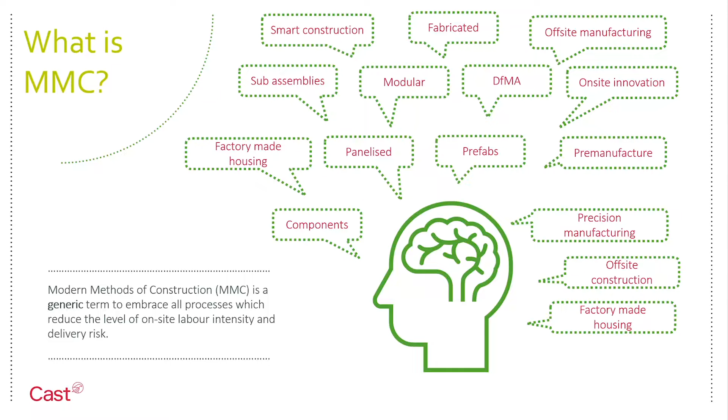What we've seen since I mentioned that report from Mark Farmer in 2016, the Modernise or Die report, which basically said the construction sector labour model is not working and can't work for the long term, is that there has been a shift from government to supporting modern methods of construction in different ways.

Just to pick up on a couple from the graphic, I think key ones are that the industrial strategies produced around 2018, 2019, started to draw connections between modernising construction, employment skills, and better productivity, output, and delivery of housing. The MMC agenda could bring those different agendas together. That was really important because it unlocked funding.

There's been commitment from government to funding in lots of different ways, and we'll hear about that later. Particularly government funding for MMC in house building through Homes England, but also in other development sectors such as education, where there's a significant drive for using modern methods of construction. This really started to stimulate the supply side and growth of investment in manufacturing.

The third one is really what that starts to do in terms of regional policy. We're working with a number of regional government bodies that are starting to draw connections between housing delivery in their regions - for instance in West Midlands, London, and Greater Manchester - combining efforts to utilise public land, public investment, and modern methods of construction to both speed up housing delivery and create industrial benefits in terms of research and development, advanced materials, jobs, skills, and training. No doubt we'll hear more about that as we go on.

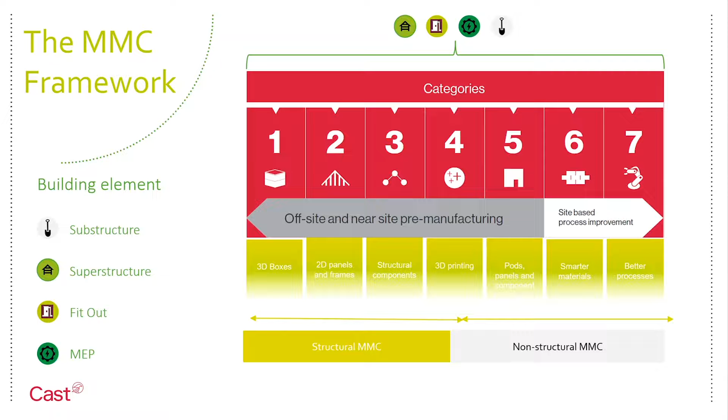Another phrase we should define early is PMV, or pre-manufactured value, which measures how much work is done away from site. To calculate PMV, you work out the value of a build, then work out how much of that value is done away from site—the result is a measure of how much of your building is MMC.

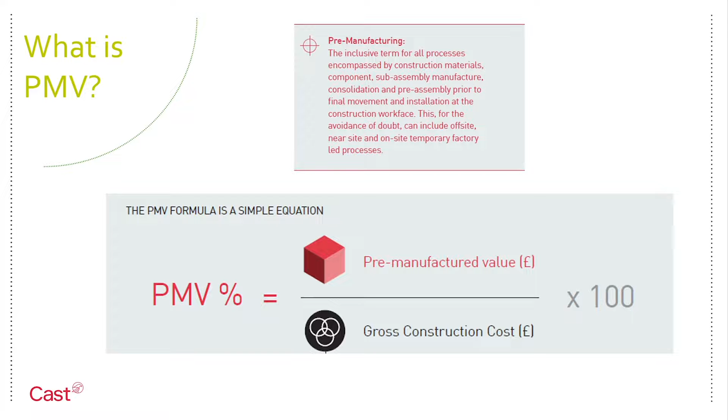PMV is important because some of you may have heard it talked about in terms of funding, as a metric for the extent of MMC. From our point of view, it's really just a proxy for doing things better, and it's not something you necessarily want to be driving to a high number on.

It's something you want to be thinking about in terms of what's the optimal number for PMV. In the funding arrangements there's a 55% kind of aspiration for PMV. Those larger volumetric offsite schemes I talked about would achieve 60-70%, and that's not always the right answer for a scheme. So one thing to think about in conceptualizing MMC is optimizing pre-manufactured value—for my site, given logistics constraints, the contractor model, and the labor force available, what's the way to push from where we are now to a better PMV, not necessarily saying that going right to the end of the spectrum is the right way to go.

I'm conscious I need to keep to time, so I'll fly through the next couple of slides. I think you'll hear about this later, so I won't touch on it too long, but that concept of PMV is now landing in funding agreements, and you'll hear more about that through the rest of the presentations.

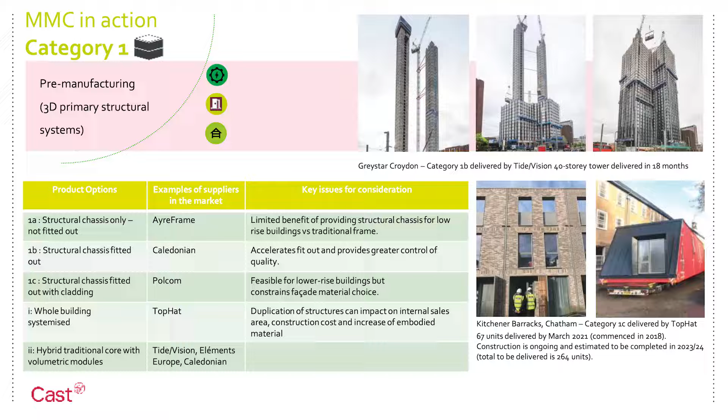Just very quickly to give you imagery and examples behind that definition framework of what is MMC: this is category 1, the far end of the spectrum—3D boxes assembled in a factory, created in a factory and assembled on site. The example in the top right corner is the world's largest volumetric tower in Croydon, a 40-story tower delivered in 18 months, exemplifying the benefit of a tight inner city scheme. A complex building makes more sense here than in lots of other situations to take as much work away from site as possible, then finish the job on site by assembling those modules. That's category 1.

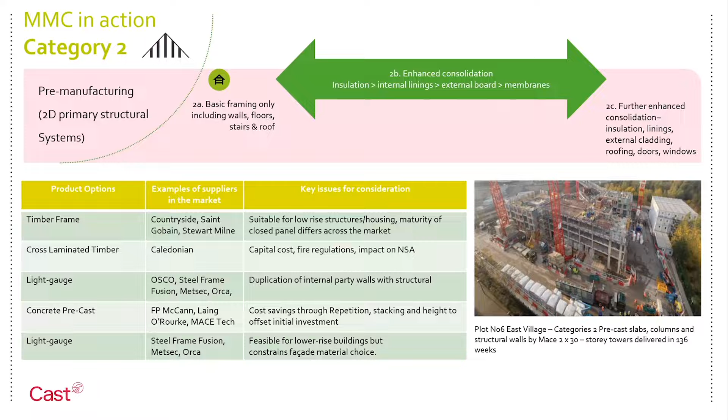Back to the previous one. I want to touch on market trends and what you might be hearing about out there in the market. The first trend is that this is starting to take off now. Not only are specialist modular and other types of MMC manufacturers starting to emerge in scale, but we're seeing it being picked up by house builders and major developers in this country, which I think is a sign of maturation in the sector, a sign it's becoming a bit less out there. If the likes of Berkeley, Barratt's and Countryside are investing in their own manufacturing capabilities, then that logic around it being smarter, less workforce dependent and more productive to do elements of buildings in factory situations is starting to land. You can see that commercially that's being picked up by big organizations in this country.

This is something manufacturers are learning, developing, evolving as we speak. It's something that will continue to evolve. The fact that we have failures in this space is instructive, something to watch out for. But I think what we are seeing is actually a maturation, and certain sorts of business models will become more productive, more useful, more evolved to market conditions than others.

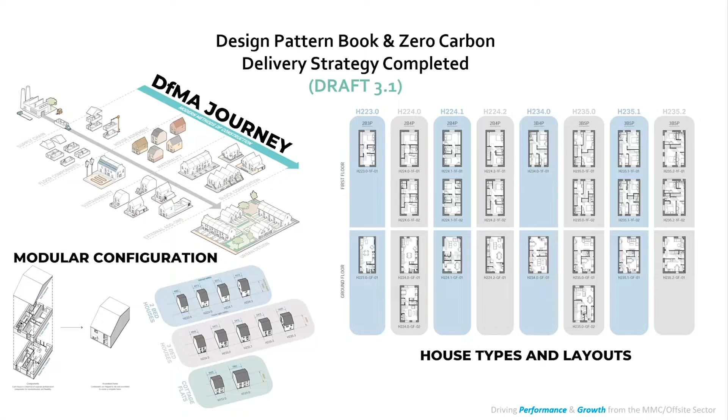If you can just slip through the next two slides, please. So the slide before is just the master planning and how we lay the houses out and how we design them right through to future home standard, which is where we started. But we also have a strategy for passive house and net zero carbon as well, and embodied carbon, looking at how we get from where we are today right through to zero carbon.

And a lot of the RPs are saying, what's the point in going to future homes? Let's go straight to zero carbon. Let's get the fabric first sorted out, and then we can plug and play with the systems moving forward. So we've done a lot of work in this area.

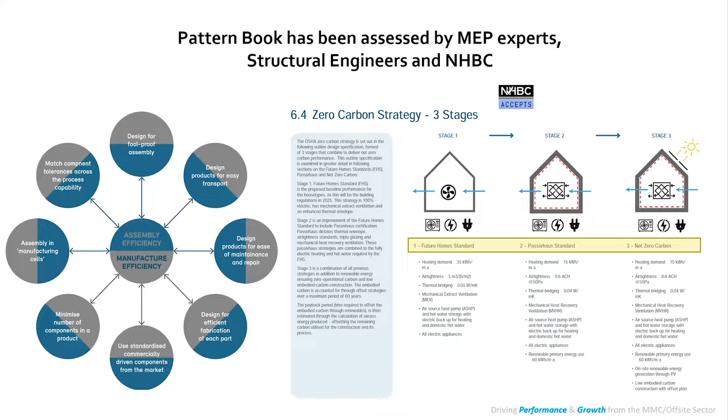Next slide, please. And here you can see just an example of what's in that design and zero carbon playbook. There's a lot of information in there, including things like environmental design, costings, estimated bills, carbon payback periods, and that sort of thing. So we've done a lot of work on this.

Particularly, it's taken a long time, almost 12 months to develop this playbook, which has now got an NHBC accepts stamp on it, as it is at the moment, to RIBA Stage 3, and they'll be working with us to make sure that we deliver this in its full glory.

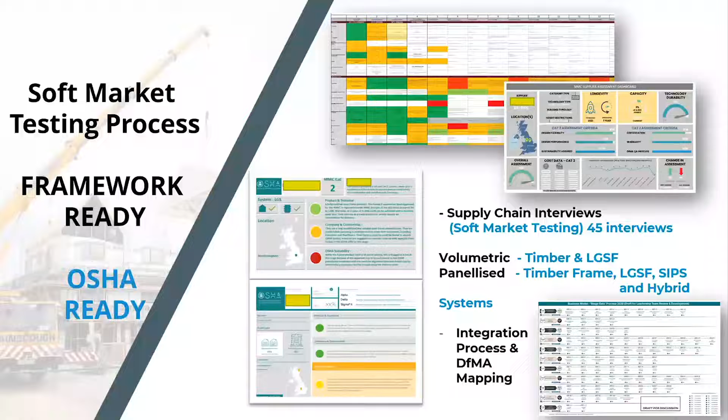Here's an example very quickly of how we're looking at vertical integration. So where the project starts, what we would need to do, looking at the sites from pre-delivery right through to RIBA Stage 3 and onwards, because this is really important, trying to understand whether the site is ready, what type of system is right for the site, etc. So we'll be looking at all of this and making sure we provide support and guidance on this as part of the framework.

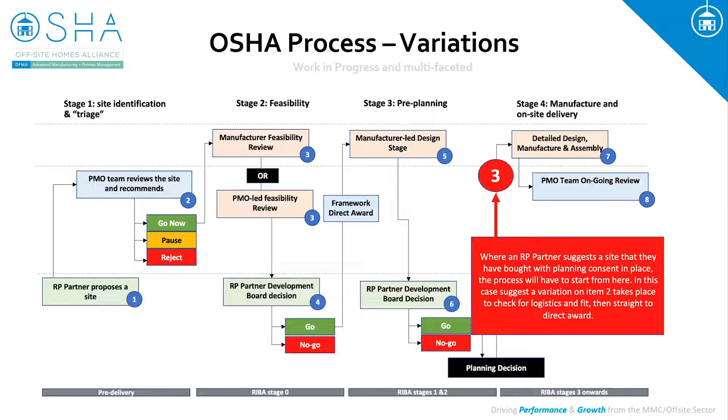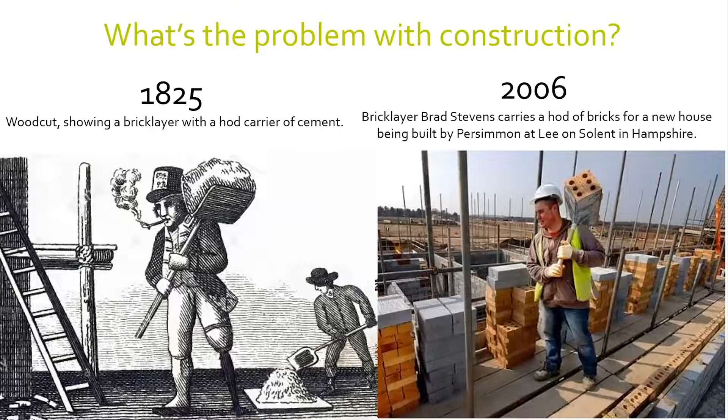We talked about the economy and the construction. We've already heard from Charlotte earlier on the 5-point plan. All I wanted to say really is that it's a cross-cutting theme for Homes England. So support for MMC is being embedded through our digital colleagues across all of our programmes. It's not just the Affordable Homes programme, but the next 10 minutes or so we certainly will be covering examples from the Affordable Homes programme.

Okay, next slide please. The Affordable Homes programme, £7.4 billion, so a significant contributor to the delivery of modern methods of construction. For those who don't know, there are two routes to funding. We've procured strategic partners, 31 of them have signed up to the minimum 25% target, and that's delivering the higher 3D and 2D modular, or more than 55% of the home being pre-manufactured.

It should be said that there is also funding available ad hoc, site by site, for non-strategic partners. It's called CME, continuous market engagement, and we will look at schemes. The useful thing for continuous market engagement is there is interest from local authorities, SME providers, community land trusts, a whole wide range of types of providers, and we look at schemes individually, scheme by scheme costs.

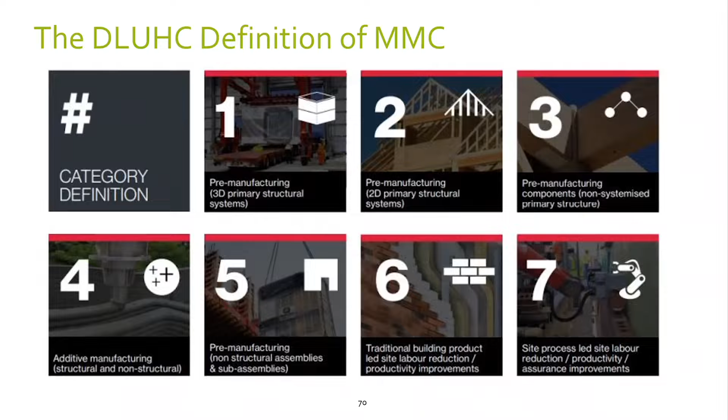So next slide please. Just a quick reminder, we are using the 7 categories. They are available - they were on the slide earlier, but they are also on the .gov website, and we can post that in the chat for anyone who's interested. I won't go through the detail - I think there was quite a lot already covered on the 3D, the 2D, right down to site process, site labour reduction. So come and talk to us, or go and have a look on the website. We're here - I'll post my contact details if anyone wants to talk to me about how that fits with the Affordable Homes Programme. Next slide please.

PMV - I see there were a couple of questions about PMV and how it's calculated. Our colleagues from CAST really are experts, but yes, come and talk to us, go and look at the website. I think there was a link earlier in the chat, so I won't touch on that. It's a percentage, and for the Affordable Homes Programme, we're looking at any homes that are delivering more than 55% - that's one of our priority areas for funding. If you do that, we will give you a bit more grant, subject to the value for money. Depends where you are on the programme, what the procurement is looking like. So next slide please.

And at the end, the pre-manufactured value - again that's a calculation you put in manually. And we would ask that it's populated at the point a scheme and a home is completed. So as soon as possible, but absolutely by completion, please.

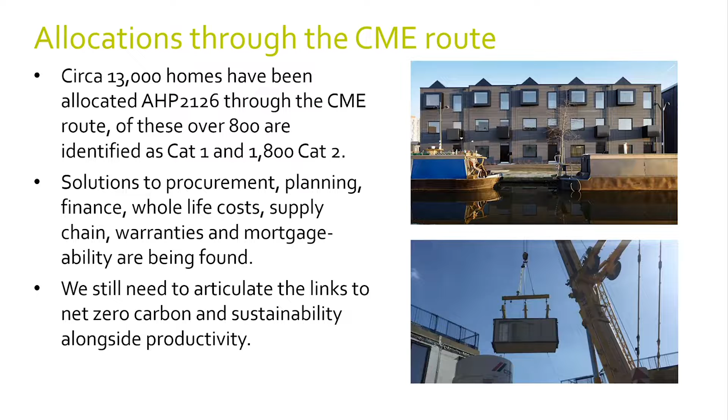So the good news for us is that we're seeing real commitment from our partners to that whole agenda for modern methods of construction. We did have some questions about how the link to net zero carbon sustainability is also being articulated. I think we need a bit more work to draw those elements out of the modern methods of construction in the programme, the AHP 21-26.

Next slide, please. So the next few slides I thought would be really useful to just showcase some of the schemes that we've grant funded through the Affordable Homes Programme. Please don't worry about reading the detail - it's there for you to have a look at later when we circulate the slides.

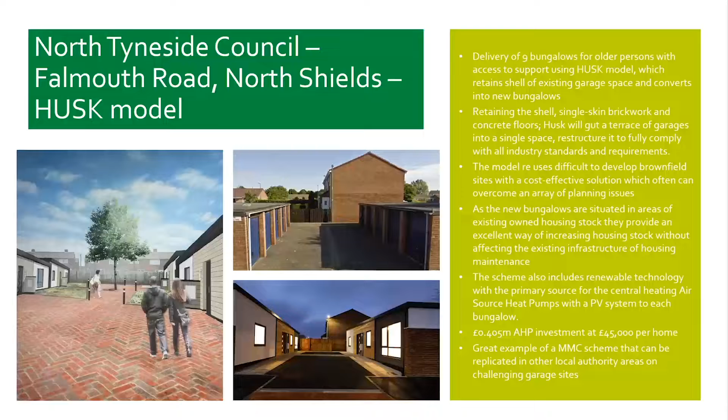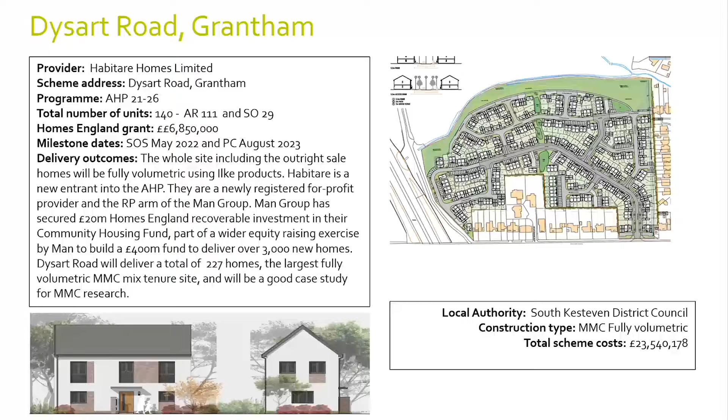And you can see at the bottom that they do have quite a traditional look, not so new agey as maybe some of the city centre sites might have. Next slide, please.

BoKloK on the Brook, we know it as Airport Road. This is a scheme being brought forward by Bristol City Council. It's fully modular, off-site manufactured. BoKloK, for those who do not know, are a joint venture between Skanska and IKEA. So they are building 173 homes, 43% of those affordable.

We're putting grant in to increase the Section 106 beyond the bare minimum. It's an area of high affordability pressure, and there are homes for rent, homes for the open market, and low cost home ownership. So we're really pleased to see this. It's

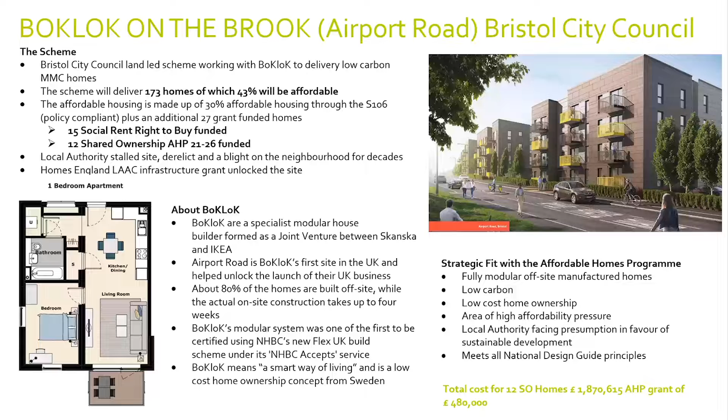also one of the first to be certified using the NHBC's new Flex UK build scheme under its NHBC Accepts service. So we're really interested. Please don't worry about the slides, as Victoria's just put in the chat. We will share them, you can look at the details at your leisure. Next slide, please.

This one is Brue Farm, and it's an example where we are enabling MMC through both our land disposal and the affordable housing grant. So the site was disposed of. It's a collaboration between Abri, Keepmoat and Ilke, and then we did convert it to 100% affordable housing using the Ilke Modular Homes product. It's over 75% PMV, so it's 100% Cat 1, and I'm particularly impressed with this one because they are ensuring we have local people from Highbridge who get apprenticeships. So part of that allocation is delivering more than just the affordable housing, the MMC.

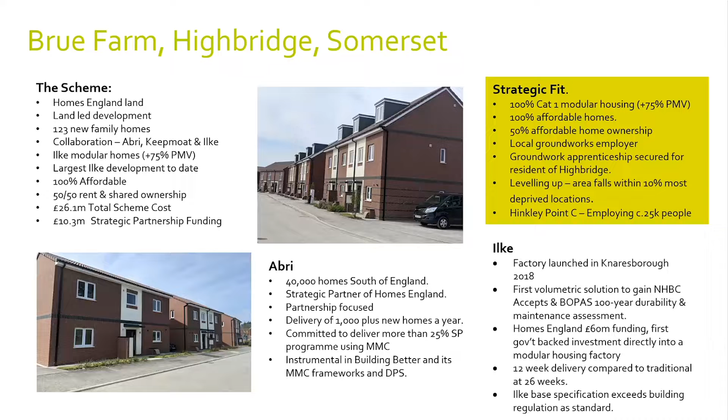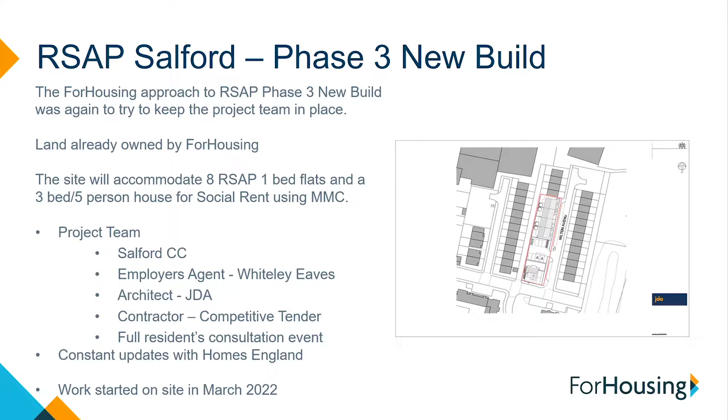So our approach now is going to slightly change. For RSAP phase 4 and phase 5, again we bid on these phases and we've been successful on both. Our approach here will change slightly, in that we will be looking to develop these sites in partnership and working closely with the Offsite Homes Alliance. We're one of the 23 partners working closely with Mike and the other RPs, and we're close now to moving forward through the framework to look at how we can develop and deliver these next 2 sites.

This is a small site in Eccles. This will deliver 6 one-bed flats through the Offsite Homes Alliance. We're just about to get the planning application in, and hopefully we'll get a start on site in September 2022 on this one.

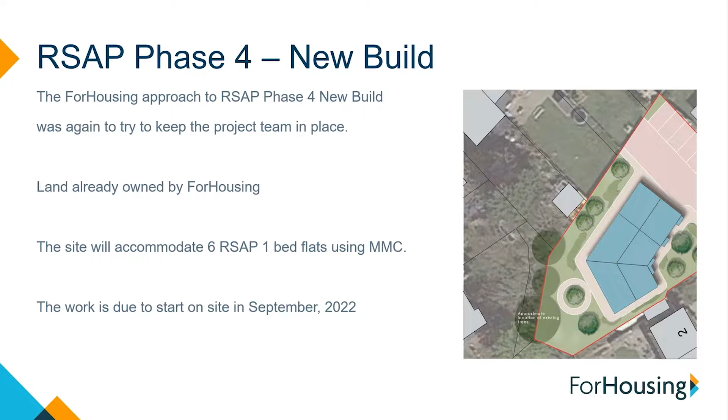This is phase 5, and we've just had confirmation a couple of weeks ago that we've got a next phase to deliver using MMC. Again, this is something we'll look to deliver in partnership with the Offsite Homes Alliance. This is for 8 one-bed flats, and this is an infill site, not a garage site. Again, land that transferred over, and having that land sat within the organisation has been key for the whole RSAP process, and also key for looking at the Offsite Homes Alliance and the modular product we can use.

The key thing here has been that we'd already done a lot of site investigation work and initial feasibilities on the sites. We have about 100 sites across Salford, and about 30 of those are developable and deliverable. What we've done historically is complete option appraisals for the sites, looked at all the legal packages and worked out what we can do. The key thing is that if we had to acquire these sites to do the RSAP programs, the cost of acquiring them would make it probably impossible, because land values and land costs, like in all areas, are on the increase continually.

So the fact that we've got this land in our holdings, and that we don't have to go through an actual purchase process, has been really helpful. This site, again, we've just got the allocation through notification during the last 2 weeks. We've got the project team in place already, and we had the kickstart meeting already this week.

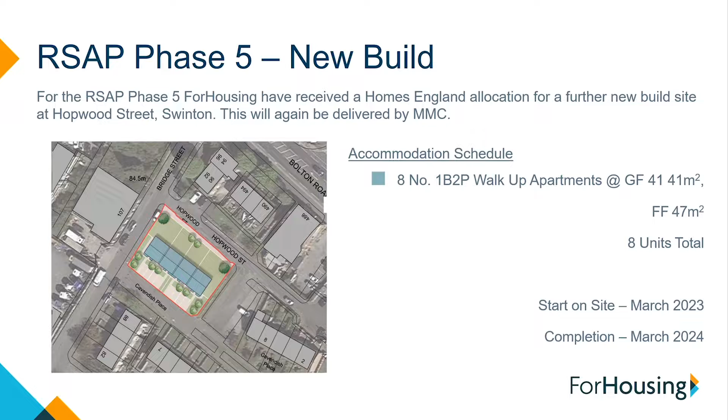So the future as well for us and the RSAP programme and modular construction. The first one is that we're looking at another site, and we're hoping that'll be another bid round from Homes England coming out. We're looking at that site as an MMC RSAP care leaver accommodation product, something we'll work closely with Salford Council on. A key across all of the schemes, working closely with Salford Council, is ensuring that the revenue funding is in place, and that's something we've secured as well.

So the next scheme will be a 4-unit scheme. It will be a care leaver accommodation scheme. That's something we're really keen to move forward.

What we've also done as an organisation, we've looked at the other sites that we have in our ownership, and we have other sites that we can develop. So we're looking at those sites to develop, looking at either mental health deliverable schemes, or learning disability schemes, or even looking at working with ex-services and how we can deliver those schemes. The key for us will be to deliver them through the Offsite Homes Alliance, and we're looking forward to doing that over the next few months and the next couple of years.

So our journey on MMC continues, our journey on RSAP continues, and we're looking to move forward with a number of schemes over the next few years.

So that concludes my presentation. I think I've gone through it quite quickly, but I'm happy to hand over to Nigel if he's ready to move forward. Thanks, Paul.

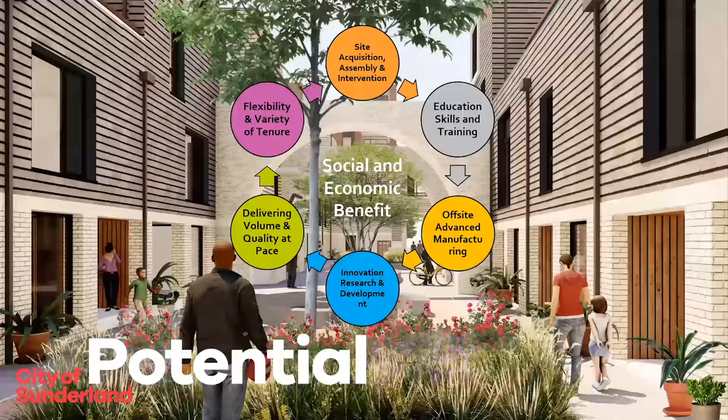This will be a state-of-the-art learning facility. It's backed by £10 million of levelling up fund investment. And we believe it's a real opportunity for us to work with industry and with academia to inspire the housing professionals and housing workforce of the future.

Creating that link between academia and industry is really important, and it will help us to ensure that the skills of local people meet the future needs of the industry, particularly in the housing supply chain. In time, there'll be a need for more multi-skilled operatives, less specific trades, less wet trades as we move to an advanced off-site manufacturing approach. It'll help us to facilitate research and development and support our wider retrofit and decarbonisation programmes.

One of the biggest improvements will be to help us retain and attract talent to live and work in the city, but also to the construction industry. I think MMC is critical for protecting the industry. At the moment, it's not an attractive offer, particularly in our part of the world.

The weather isn't kind to us. Young people don't want to enter the construction industry. They don't want to work 10 stories up a tower block in a gale force wind and throwing down rain. So introducing technology and advancement and working off-site will be far more attractive to younger people.

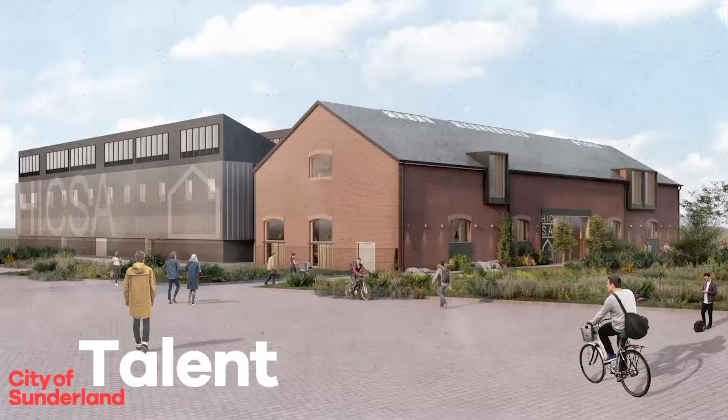Moving on from the skills, employment training, we're working with Homes England and the Offsite Alliance and other strategic partners to establish a regional offsite manufacturing hub. We see that as the next step in our ecosystem. So once we've created the resource and the technical capability, then we want to roll out a framework that's part of a national strategy for delivery of MMC that can address specific challenges within our region and our policy goals.

So we're specifically looking to build on the successful growth of the automotive industry within our city. Nissan is a great success story. They've grown a supply chain around them. It's extremely sustainable as a business, and there are a lot of transferable skills and technology and experience that can be applied to the housing industry.

Nissan and the automotive industry has really diversified into electric vehicles, which is seeing the end of the combustion engine, and they're managing to do that at pace. Housing has generally struggled to do that, and we need to find ways and learnings from the automotive industry that we can apply to the MMC sector.

So we want to work with regional, local partners, create a more coordinated supply chain, manage supply and demand, improve aggregation that will help us to allow aligned development with manufacturing capacity. We're seeking to provide dedicated facilities for regional SMEs, so people looking to enter the MMC sector or scale up their operations. We're trying to create a scenario where there's co-location, where we can encourage and optimize collaboration and knowledge share.

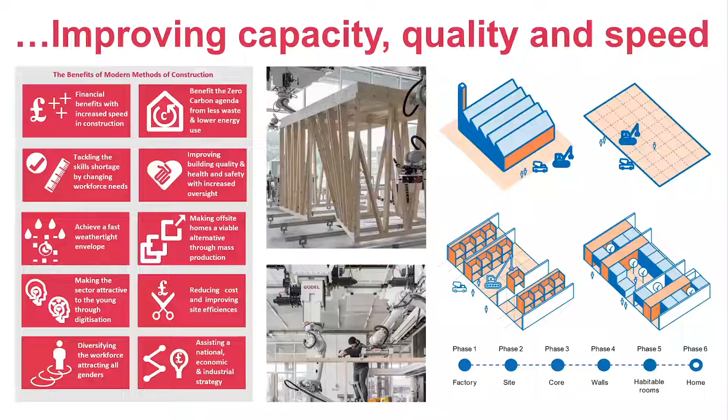So the first of those is Riverside Sunderland, which is our flagship carbon neutral urban quarter that we're delivering at the heart of the city, on a site that was previously in the ownership of Tesco. We've took that back and are really starting to drive forward development and regeneration and put Sunderland back on the map. Riverside Sunderland will deliver around 1,000 new homes in 4 new residential neighbourhoods.

All of these homes will be delivered using MMC, low carbon, smart and digital technology. We see it as being pioneering for the city and for the region, and it provides a real opportunity for us to instigate some of the changes I've talked about, engage industry, and change the mindset around the delivery of MMC at scale. I can't reinforce enough, we need to move away from pilot projects. Monitoring, evaluation, research and development is great, but ultimately as a city and a country, we need to start delivering.

So through early investment and our commitment to quality, we're looking to disrupt the market, unlock long-term investment, and take a different view to how we fund and develop new homes. We've secured around £40 million of central government funding to date to support the Riverside Sunderland scheme, and we've submitted a much wider ask to government around our holistic ecosystem, which is well over £100 million. So we're really thinking big here. We're really trying to force a change, and we really want to support the growth of the MMC sector.

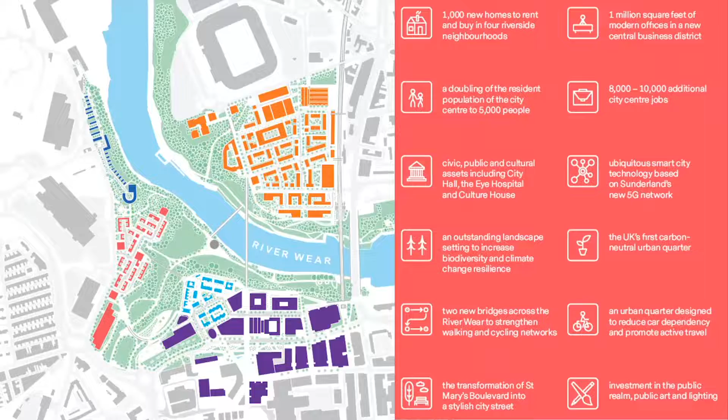So David, if I can hand over to you just to provide a bit of an insight into Vaux Housing and the Home of 2030. Yeah, thanks, Neil. So the first residential community on Riverside Sunderland will be the Vaux Housing, which will be situated on the old Vaux Brewery site, and will lead the way in the innovation of new houses in Sunderland. It's been designed to radically change people's perception of urban living, with the aim of helping to repopulate our city centre.

When complete, the scheme will comprise 135 highly sustainable dwellings in the heart of the city centre. The scheme will be utilising MMC Category 2 technology, using a closed panel timber system and light gauge steel. This will result in 114 units being built to 2025 Future Home Standard, which is a 75% plus reduction in carbon emissions. And we're pleased to also develop 21 units that are going to be built to Passive House standard.

At the start of the process, we had an ambition for the whole of the scheme to be delivered to Passive House standard. However, the procurement process highlighted the current limitations the leading MMC timber frames and contractors have in terms of meeting airtightness performance, which meant that we had to reevaluate this. The other important lesson we learned is that if you're looking to use a timber frame supplier to deliver your scheme, it's important to bring them in early to the process, to work with the design team to ensure what is designed by the architects can actually be built, as the standardization of some of the systems often restricts change and has already highlighted the level of performance possible.

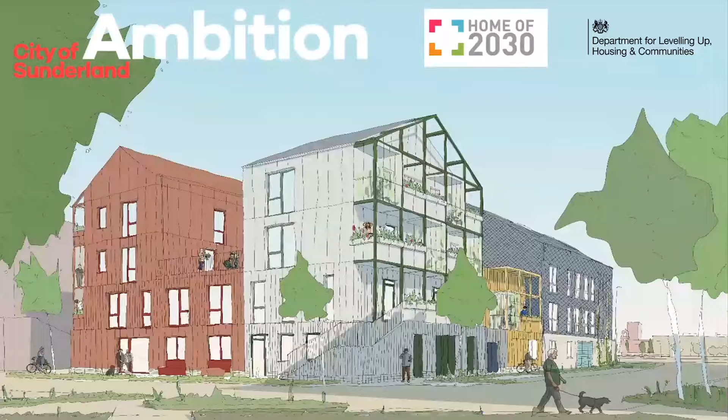So I'd like to talk a little bit now about an initiative called the Home of 2030. Originally launched in March 2020, the Home of 2030 scheme was a design competition launched by DLUHC, created to drive innovation in the provision of affordable, efficient and healthier green homes for all. In December 2020, DLUHC announced the joint winners of the Home of 2030 competition. Those were Plus Home, designed by Igloo Regeneration and Mawson Kerr, and Connector Housing, designed by Open Studio. They were joint winners of the competition.

As Igloo and Mawson Kerr were already key members of the design team on the wider Vaux housing scheme, we had discussions with representatives from DLUHC around delivering the joint winners' schemes as part of the Vaux site.

DLUHC were supportive of this idea to showcase the winning designs and have provided a grant of £2 million to help us deliver the Home of 2030 winners' designs as part of the wider Vaux housing site.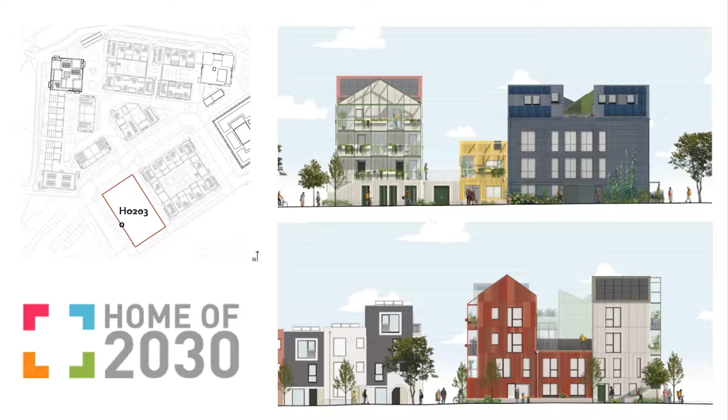To showcase the Home of 2030 dwellings and the wider trends in future living, Sunderland City Council will be hosting Expo Sunderland in 2024. And at this point, I'll hand back to Neil, who's going to talk a little bit more about that.

Expo Sunderland is a real opportunity for us to inspire a generation, showcase our achievements across Vaux, Home of 2030 and Riverside, and really engage housing professionals and policymakers in MMC, digital technology, and the journey to net zero. We want to engage our people in more active communities, aspirational lifestyles, and promote the skills and talent of local people and local businesses. I think across Riverside, Sunderland, we're seeking to use innovative construction technologies.

So we're building the houses using MMC, but we're also delivering other parts of the regeneration using off-site advanced manufacturing techniques. So we've got a new bridge which crosses the river. It spans almost 240 metres, and we're intending to prefabricate significant sections of that off-site to reduce the exposure and reduce the programme as much as we can. I think we intend to have one of the biggest crane lifts in history to lift the bridge sections into place.

We're delivering multi-storey car parks that help us to move cars out of the community to the edge of the development. And again, we're using system and modern methods of construction to deliver those facilities. So it's not just about the housing.

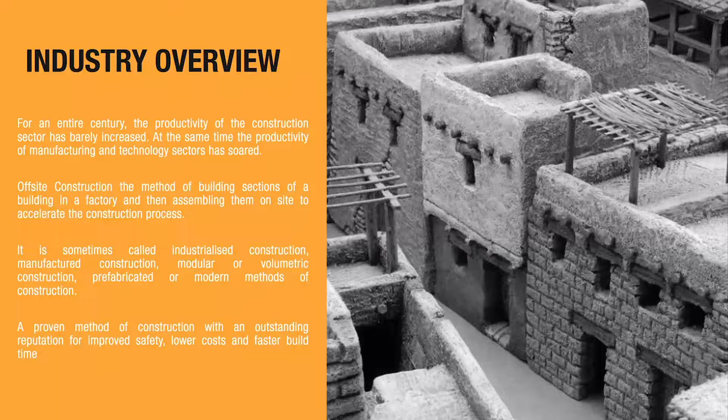I think the most important ones, the ones that are really jumping out at the moment as a significant problem, are the skills shortage. We're about to lose 750,000 construction workers in the next 15 years. Another interesting fact is only 3% of students aged 16 to 18 look for construction related courses, and then we only retain 41% of those that enter the industry.

And what are we doing wrong? Lots of things. We're not teaching our kids that construction's cool.

I think another one is obviously the chronic housing shortfall. We need to build a huge number of homes and we need to do that fast. I'm not saying they will all be built off-site. We're never going to go to a place where everything's built off-site or MMC. We're going to go to a happy mix where we start to improve the productivity of the sector.

And then lastly, I think the other big one for me is we need to reduce our carbon budget by 68% by 2030, and the construction sector accounts for a huge amount of those carbon emissions.

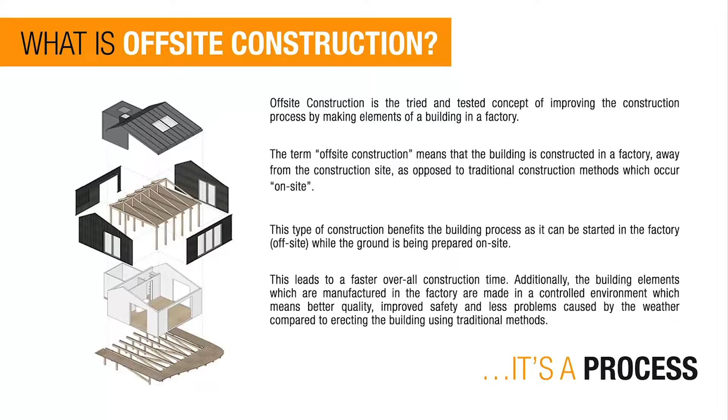Designing for offsite is a really key part, and you need to think about running offsite projects slightly differently. It should mean you have fewer contracts to manage and need less engagement from a main contractor if you do it right.

If you really want to reap the benefits of offsite construction, you need to think about how you approach your projects, and the design must come first. You can't go to a traditional architect and say, please design me this scheme, and then go to a manufacturer and hope it will work.

You need engagement with your manufacturing supply chain very early, and you need to make sure you're appointing the correct project teams. Does your architect understand working with that manufacturer, and do they understand how to design for offsite?

You will need a project manager who is a specialist in running an offsite project, who understands that the process is different. But this is the biggest part - you will reap the benefits of offsite if you design right from the outset.

And a big term you'll hear when it comes to design is design for manufacture and assembly. So when we're designing offsite, we need to factor in a lot of other things. But DFMA is essentially all about how we can design a product to be consumed by the manufacturing process as quickly as possible with as little waste as possible.

So what we're trying to do is get it from A to B in the factory as quickly as possible.

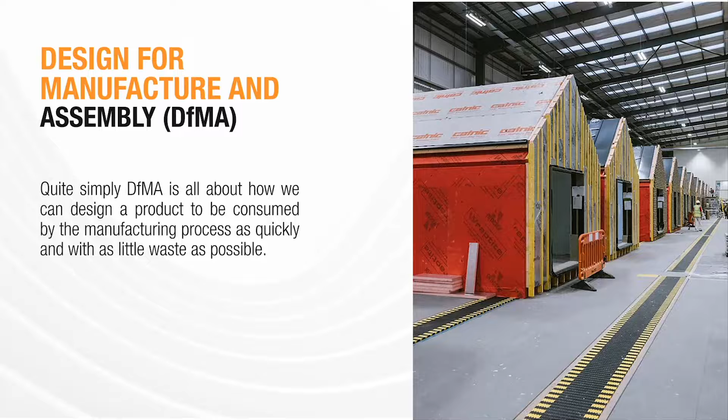Finally, I want to come to what the OA are doing to help you.

The Offsite Alliance have got 7 strategic work streams, and this is where the industry's got together with a number of problems they're all encountering at the same time. They've defined some objectives, and then we invite anybody to join who wants to join. We go out to key stakeholders to find out who should be there, and we map what works already out there. It's really important to us that we're not duplicating effort - if somebody out there is doing something, we just want to team up and help where possible.

We've now, in the ones that are up and running, managed to define short-term and longer-term goals to deliver the change that's needed. The 3 that are up and running are my skills and competencies, my design integration, and my technical solutions, all very different. The other 3 are about to start within the next 3 months. They are a huge amount of work though, in order to get them up and running.

The skills and competencies one is really interesting. They've been going the longest, and they've probably got further than any other at the moment. They are mapping out a digital competency framework for future skills, because in the future we'll see a lot of different skills that are needed, and I think we need to pick up on those softer skills. I always think about a kinesthetic, hands-on, practical person, and we pigeonhole them down one route, a bricklayer or a plasterer, and I'm pretty sure any of them can go into a factory and complete many tasks there. So it's about ripping apart the roles we've got at the moment and looking at what strengths are needed to complete those roles.

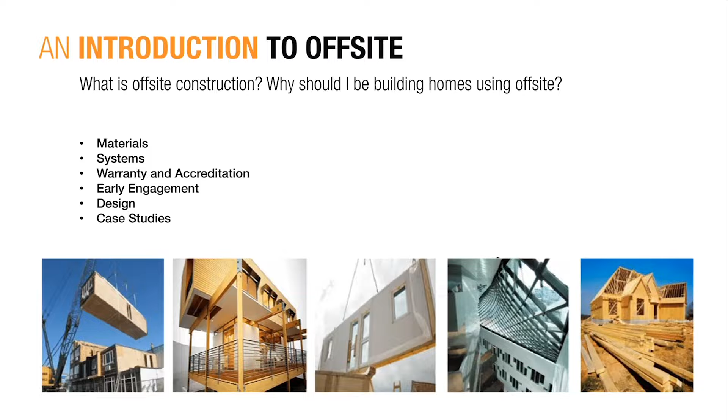Next slide please. Then the next one we are just developing out at the moment is a 1 to 3 day event called Offsite Made Simple. And this will show you how to run a project from start to finish. So session 1, we'll look at the concept stages. We're going to look at the RIBA stages, the DFMA overlay. We're going to look at procurement, construction playbook and value toolkit.

Session 2 is pre-construction. So you'll hear a lot about platforms and optioneering around the contracts that need to be used. We need to be moving more towards collaborative contracts, your design outputs, and again, the value toolkit. And then session 3 is all about that construction phase.

So what happens in the factory? We're going to look at vesting, cash flow, and then handover, of course, and continuous improvement.

And then the next outcome that will be really useful is delivering off-site homes. This is going to be focused on categories 1, 2 and 5, which are your components, panels and your boxes in the simplest terms. So we're going to look at what is off-site construction, key drivers, procurement, logistics, design and manufacturing.

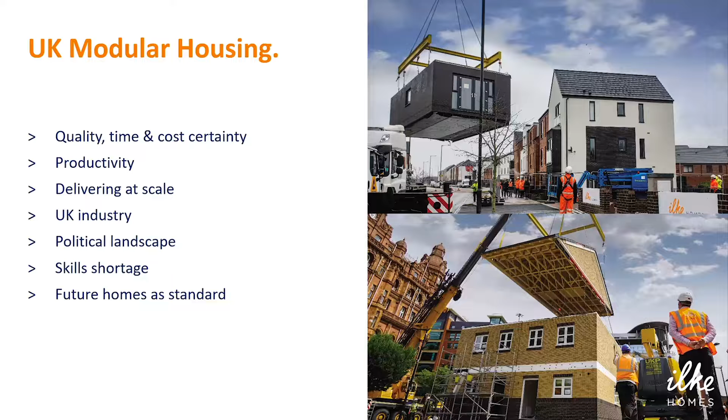So the next slide, please. So to make it work, we had to look at the right people, and there was no point just creating a factory and taking people from building sites and putting them into the factory. So the people we were looking for were production type operatives. So 90% of the people we employ don't come from a construction background. They come from manufacturing, they come from retail, they come from other sectors such as care.

We then had to build a product, and I think some of the questions from this morning's sessions were around, it's no point just building boxes that people don't want to live in. We're building homes. We have to build something that's aesthetic, something that can be user friendly, something that people want to live in - they've got a street scene. Big challenge in all of this is we have to please the planners. So whilst we can produce materials and products off site, what we can't do is go against planning. So we have to build something that looks like, feels like a home.

We have to build something that fits with the local vernacular, something with that local touch and feel. For all the product out there, people still want to see a brick-built home. That's been a real challenge for us: building something in a factory through production, but giving it that artisan feel.

The other challenge is getting the investment. We've invested over 500 million in our business so far on a pipeline basis. If you're going to get the banks, taking the case with Sunderland, to invest and show how you're going to build a business, you need that pipeline of opportunity.

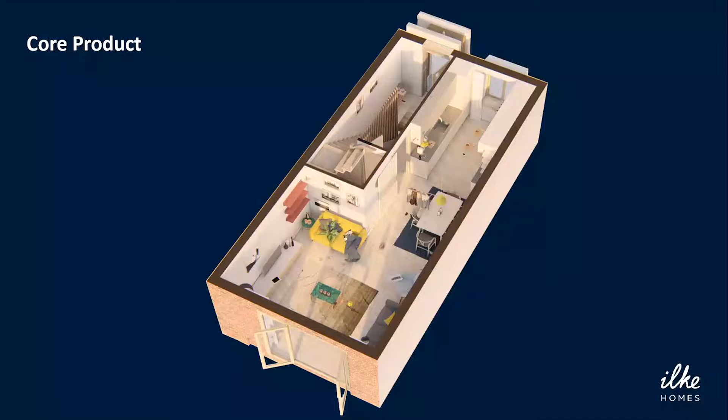So what we're creating is a home. If you were to take a layout printout of a Taylor Wimpey home, a Barratt home, or any of the traditional house builders, we're trying to create something very similar from our core product. You've got the front door, back door, the same number of windows, the toilet under the stairs. But we've also taken feedback from customers about what worked in product one and what didn't. So we used to have toilets coming off open living spaces.

We've changed that now. This product actually meets the standard for 2025 already, so we've designed in all that future proofing and future learning. This product can be used for either net zero, a zero carbon in performance home, or can have a traditional gas boiler. We originally designed it without gas boilers because we knew where the regs were going, but unfortunately customers still want a gas boiler, so we've had to reintroduce that into the product.

So we're trying to design in for the future, to future-proof the product from a build perspective. We're trying to take customer feedback to make sure the home works as a home should for the occupier, but we're also trying to design in efficiency of build. And we're trying to bring together the culture of manufacturing and the culture of development, and that hasn't been easy over the last 3 years. I used to have dark hair when I started this journey, and it's not been without its challenges.

From a manufacturing perspective, taking a lot of the points that Sunderland and the Offsite Alliance have made, it's around having that client engagement at an early stage to understand what they're getting. It's about using the architect where they can be efficient, so we can create the street scene, but use the standard product to make sure the street scene delivers what the customer wants.

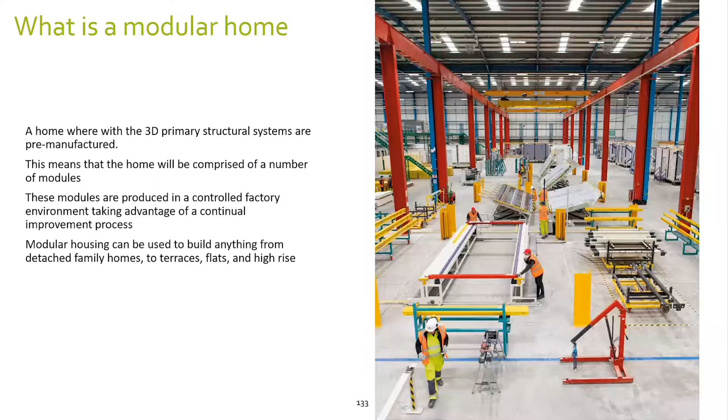So cutting edge technologies of new buildings aren't just in Tokyo or Berlin or New York, they're actually in Croydon, they're in Selby, and they're in Corby too. To the next slide, please.

People often ask us, why modular? Tell us the facts about modular - here are a few of our personal favourites. Modular homes are built with up to 97% less embodied carbon, which helps to reach the UK's very ambitious net zero targets. They can cost up to 20% less to heat and use up to 30% less energy, which is really critical at a time of increasing energy bills for customers facing a cost of living crisis.

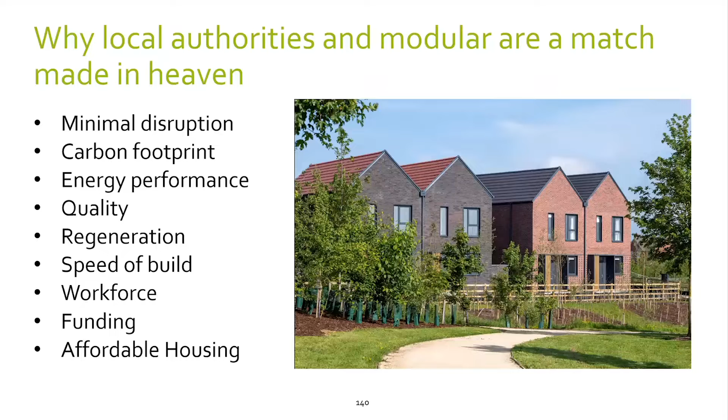Can go on to the next slide. So, concluding points for us: modular housing's time is now. We have the ability to create real change. We have the ability to create greener and better homes, and faster. We have a great story to tell.

We can help level up. We can help achieve net zero. What we are keen to do now is to work in partnership with developers, local authorities, housing associations, and indeed national government, to ensure that modular housing can continue to transform the state of housing in this country. And who knows, we might actually meet those forecasts. I think that's it from me.